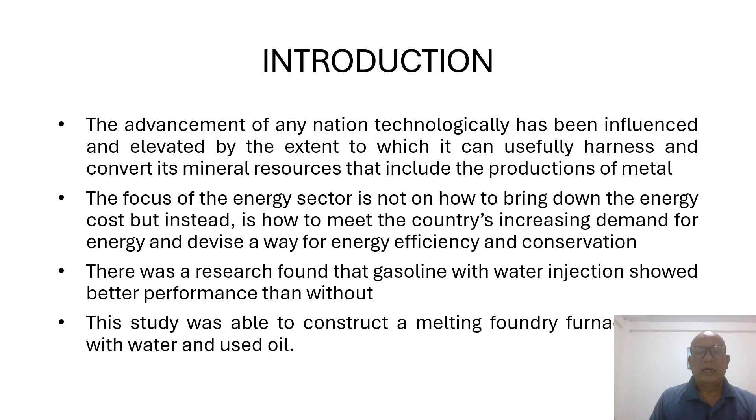There was research found that gasoline with water injection showed better performance than without. However, my study was able to construct a melting foundry furnace using water and used oil as the fuel.

The objective of my study was to investigate the functionality of a mini melting foundry by injecting water and used oil as fuel. Specifically, the objectives were: to construct an economically fueled foundry furnace; to establish a setup with injectors using water and oil as fuel; and to investigate the performance of the setup, quantified with known amounts of water and oil.

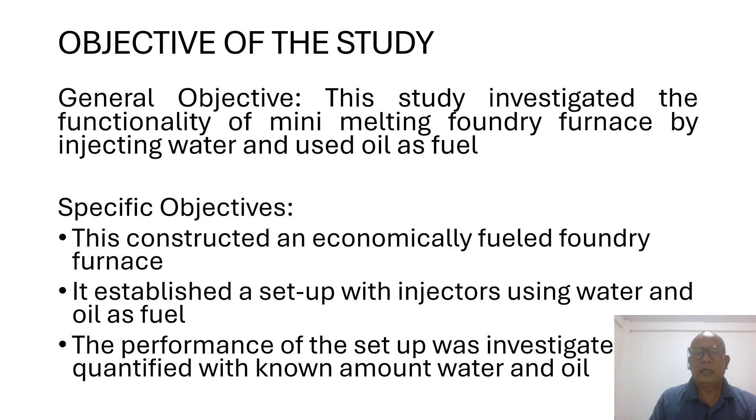The methodology that I use: we use an old cylindrical tank, 10 millimeter diameter reinforced structural bar, 1/4 diameter metal pipe, metal tubing, welding rods, steel epoxy, plastic bottles, plastic controllers, metal stand, and plastic hose.

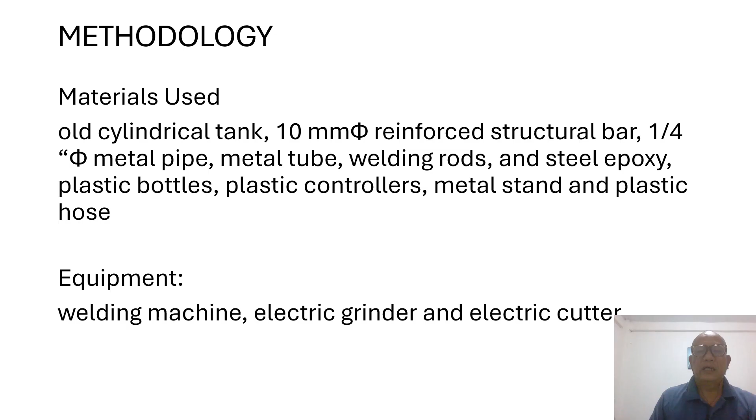The equipment that I use are the welding machine, electric grinder, and electric cutter.

For the fabrication procedure and assembly: the cylindrical tank was cut to dimension and shape to form the furnace. The reinforced structural bars were cut and welded as stand and frame. An opening and closing lid was provided with a small opening at the top. The interior was provided for placing a graphite crucible.

The burner was made with small holes and a metal tube as airflow exit. The airflow was provided with a small fan attached to the metal tube. The fan has a control to adjust air from minimum to maximum velocity. The gas burner was placed so the flame is in direct contact with the graphite crucible.

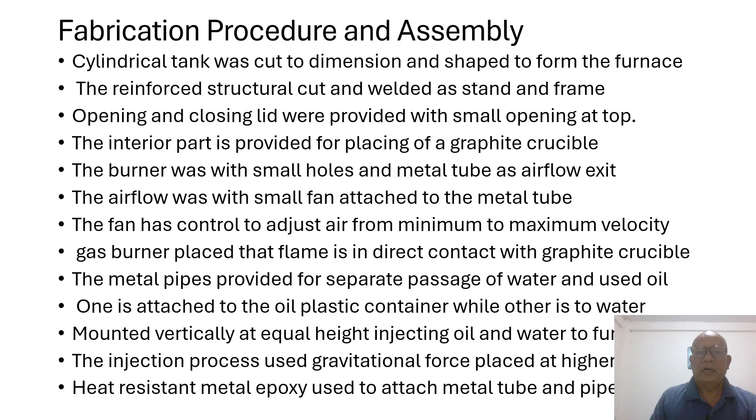The metal pipe was provided for separate passage of water and used oil, one attached to the oil plastic container while the other to the water. They were mounted vertically at equal height, injecting oil and water into the foundry furnace. The injection process used gravitational force, so the oil and water containers were placed at higher positions. Heat-resistant metal epoxy was used to attach the metal tubing and pipe to the foundry furnace.

The data gathering procedure used was as follows. The data for the first objective focused on the fabrication of the mini furnace, such as the specification, design, and major features of the furnace.

The data for the second objective were collected through several trials. Functionality of the setup was established whether it is fueled with oil, water, and air. It looked into the maximum height the burning flame reaches and the duration of burning, done by putting 2.5 milliliters of used oil inside the furnace.

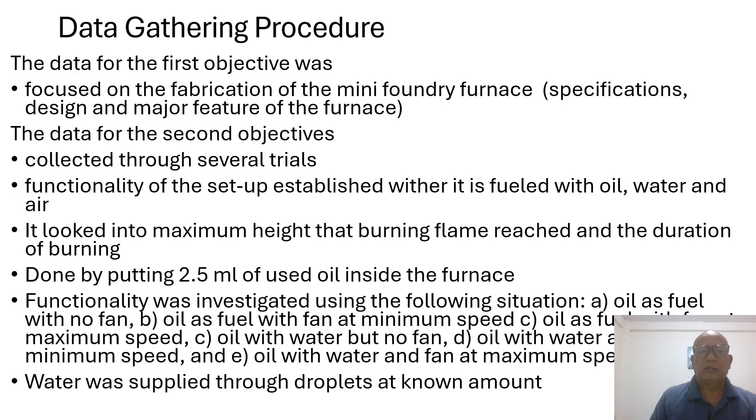Functionality was investigated using the following situations: oil as fuel with no fan; oil as fuel with fan at minimum speed; oil as fuel with fan at maximum speed; oil with water but no fan; oil with water at minimum fan speed; and oil with water and fan at maximum speed. Water was supplied through droplets at a known amount.

The data for the third objective focused on quantifying the amount of water being mixed with the burning oil as fuel. Among them: 1 droplet of water per 10 seconds mixed with 1 droplet of oil per 5 seconds, meaning the droplet of oil (D sub O) is 2 times faster than the water droplets (D sub W) supplied to the furnace, or the equation D sub O equals 2 times D sub W.

1 droplet of water per 10 seconds mixed with oil at 1 droplet per second, meaning the droplets of oil are 10 times faster than the water being supplied to the furnace as fuel, or the equation D sub O equals 10 times D sub W.

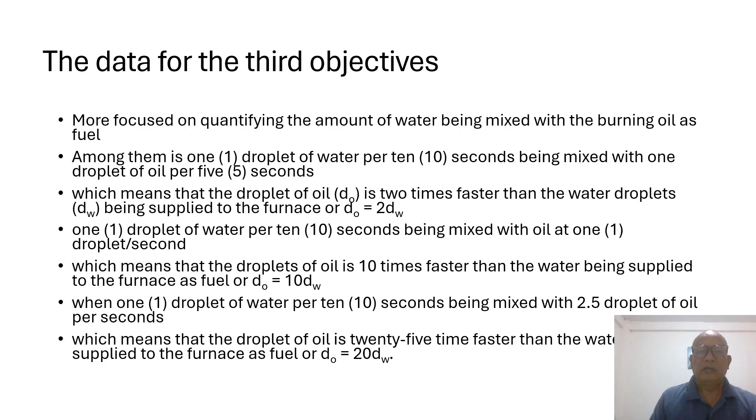When 1 droplet of water per 10 seconds is mixed with 2.5 droplets of oil per second, this means the droplet of oil is 25 times faster than the water supplied to the furnace as fuel, or the equation D sub O equals 20 times D sub W.

Regarding the droplets of oil and water: 1 droplet of oil was estimated as 33.51 cubic millimeters, similar to 1 droplet of water. The droplets occur as the fluid passes through the control for water or oil inflow, which happens since the diameters of the equipment are the same.

For the air velocity, it was supplied through the air fan attached to the metal tube. The air fan can be adjusted to attain minimum and maximum velocity. The minimum velocity was estimated to be equal to 120 millimeters per second.

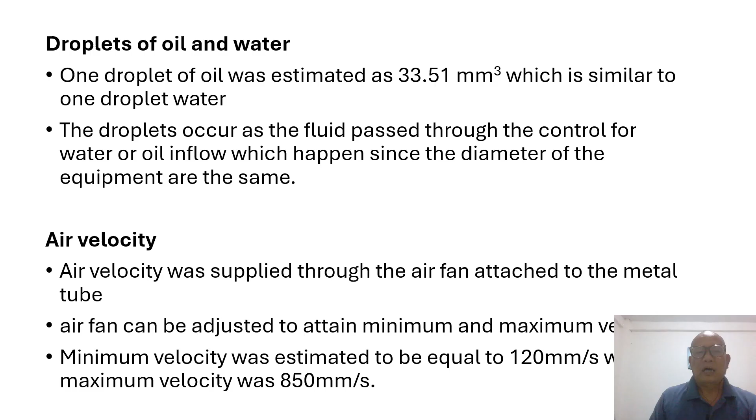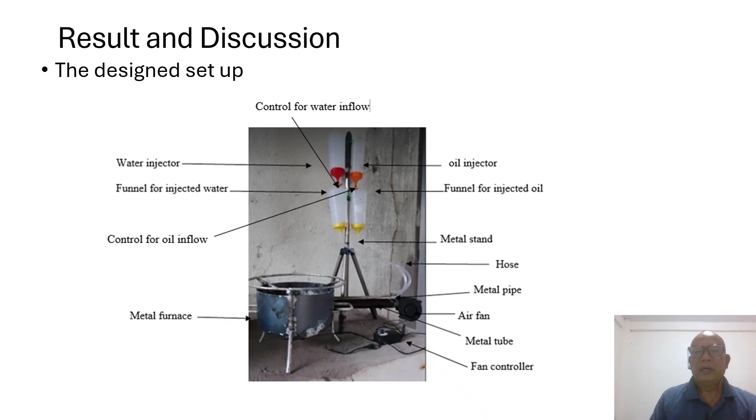In the figure, you will see the parts such as control for water inflow, the water injectors, the funnel for injected water, control for oil inflow, the metal furnace. It indicates also the oil injector, the funnel for injected oil, the metal stand. There was a hose, the metal pipe, air fan, metal tube, and fan controller. So that was the detail of the design setup.

The functionality of the setup. So I have table 1, which shows the functionality of the setup using oil, water, and air as fuel. For oil with no water and no fan, the height has reached 23 centimeters at a duration of 10.53.

The oil with water and no fan, the flame has reached 78 centimeters height at a duration of 1.23 minutes. Using oil with no water but with fan at minimum speed was 19 centimeters at a duration of 10.38. Then with oil with no water but with fan at maximum speed was 12 centimeters at a duration of 5.42 minutes.

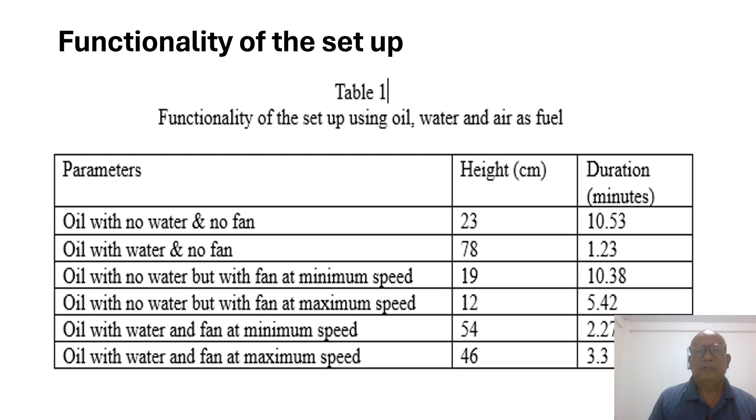Oil with water and fan at minimum speed has reached the flame of 54 centimeters at 2.27 minutes. And oil with water and fan at maximum speed has reached the height of 46 centimeters at a duration of 3 minutes.

We will see table 2, which shows the functionality with quantified amount of water and oil as fuel. Now, if D sub O is equal to 2 D sub W, the height of the burning flame reaches 3 centimeters if no air fan was supplied.

If there is air fan at minimum speed, it also reaches 3 centimeters, and with air fan at maximum speed it is 0. If D sub O equals 10 times D sub W, no air fan has reached the burning flame at 20 centimeters.

With air fan at minimum speed it is 35 centimeters, with air fan at maximum speed it is 20 centimeters. If D sub O equals 20 D sub W,

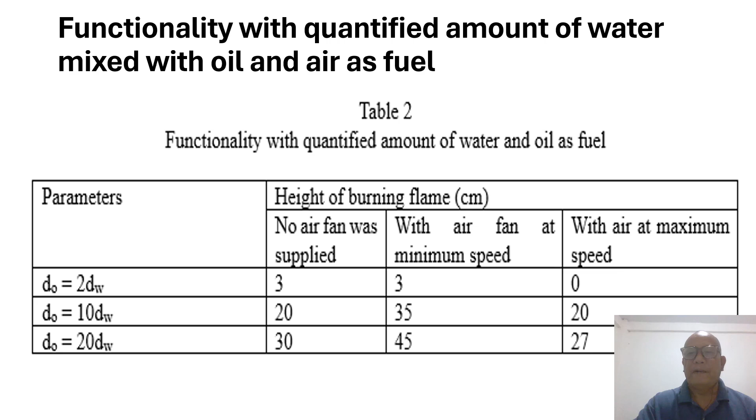with no air fan, the burning flame has reached 30 centimeters, with air fan at minimum speed it is 45 centimeters, with air fan at maximum speed it is 27 centimeters.

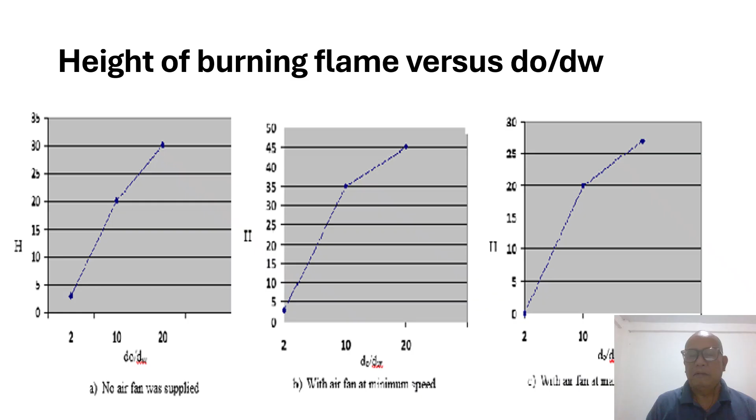And if we are going to interpret the table, it shows that if D sub O over D sub W is less than 2, the burning process will not perform. If D sub O over D sub W is greater than 2 but less than 20, the ratio is typical for burning oil and water.

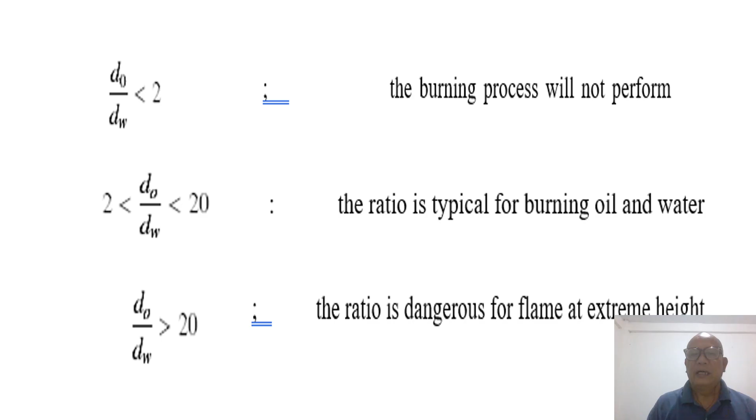And if D sub O over D sub W is greater than 20, the ratio is dangerous for the flame, as it reaches extreme height. So the conclusion of my study was that I was able to establish a setup of a furnace which

the combination of oil, water, and air was used for sustainable burning. Using oil with water and no air fan was found to attain the highest burning flame, while it also has the shortest period of duration.

Looking at the ratio D sub O over D sub W, can establish the sustainable operation between water and oil to be burned as fuel.

The functionality of the flame burning inside the furnace will not function well if the ratio between the speed of the droplet of oil against the speed of the droplet of water, or D sub O over D sub W, is equal or lesser than 2.

It may function with sustainability if D sub O over D sub W varies from more than 2 to 20. However, with D sub O over D sub W above 20, it is already dangerous for the furnace to continue the burning operation, since the height of the burning flame could reach an extreme level.

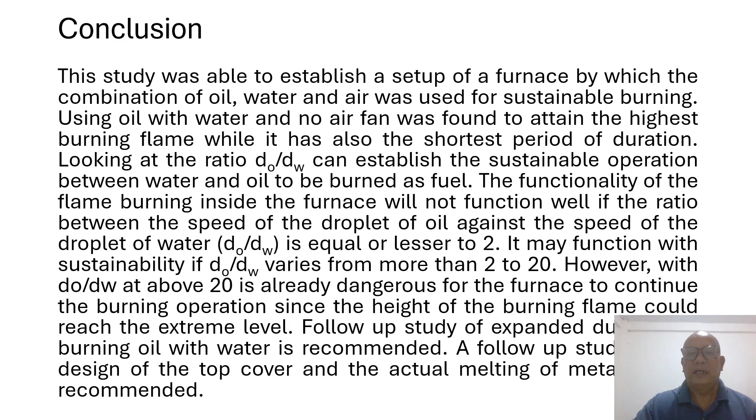A follow-up study of expanded duration and burning oil with water is recommended. A follow-up study also with the design of the top cover and the actual melting of metal is also recommended.